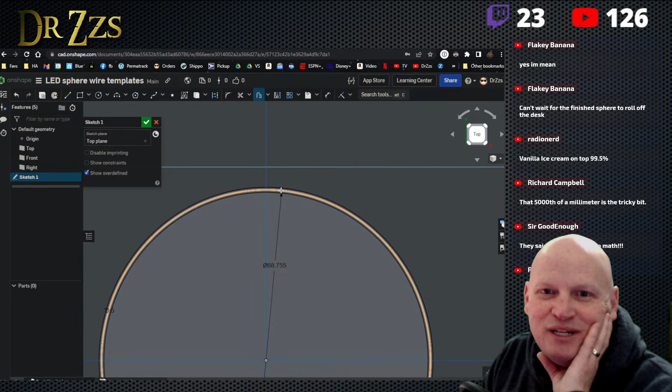Can't wait for the spinning flaky banana. Okay, that's pretty good, so we got that.

So that's great. So the next thing we got to have is we actually have to have some structure to this, so now we need a wall outside of that channel, right? So that's our wire, that's the width of our wire. So this is kind of the inside wall of the channel that we're going to build.

So now we're going to, again, offset. We're going to offset out - I mean, what's a good, 2 millimeters maybe, just to give it a little bit of structure. I'm going to go out, I think 1.5 or 2 would be fine. And 2 seems like a lot. Let's go 1.5.

Okay yeah, that's pretty good. And then we'll do the same thing on the inside. So we're going on the inside, and we're going to offset again, 1.5. Okay, so those would be the walls, right?

Go out the width of the LED. Well, this is just to bend the wire - I'm not going to have the LEDs on this part, this is just to kind of bend the wire. Okay.

Unless I'm not quite sure what Stboch - I'm not sure what you mean. Okay, so that's that part of the sketch.

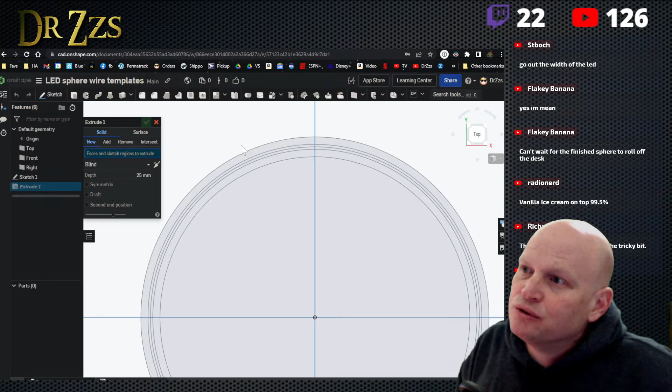Now we extrude. This is a good lesson in 3D modeling also. We're going to extrude it, and we're not going to extrude it by much. We'll extrude it by 1.5 again.

You got to think about how long is this going to take to 3D print as well, right? And then we're going to cut out a little lip here so that we can actually grab it with our fingers.

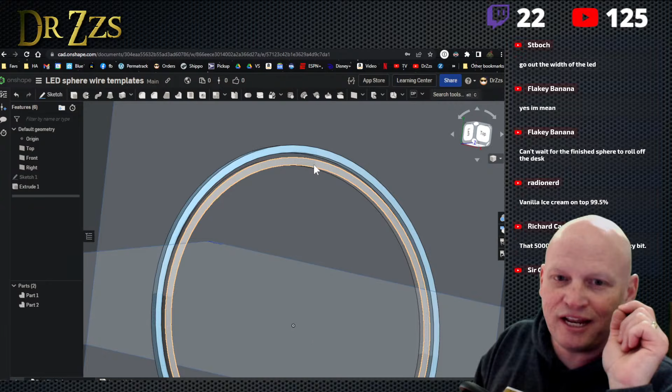If you build like a wedding cake, then you could do all of them on one. We could do that, let's do that. Just throw a squirrel at you. If you made a cone and put the grooves in at the right circumference all the way down. Yep, so there you guys go, you can do that too.

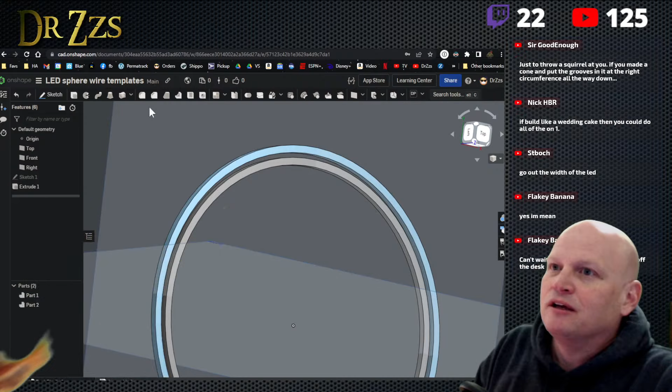But let's think about how long it takes to make this thing. All right, so then now to close this off, because I want it to have a bottom on it, I'm going to put another sketch on the bottom. I'm going to grab the edges, that's what this little guy does, so that's going to include this edge and that edge as part of this sketch. That's it, I'm just going to grab those two pieces. Now I've made a sketch that has those two, let's see if I go to this sketch.

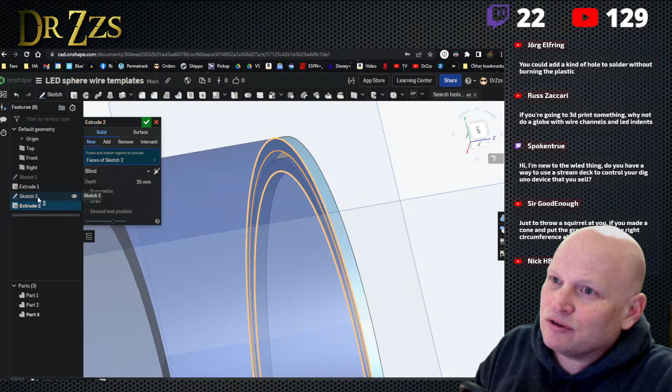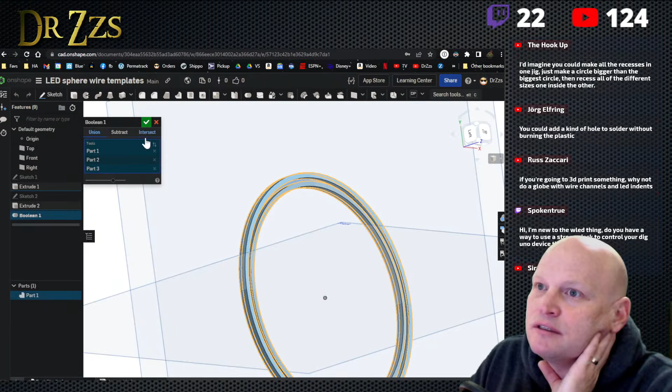Take this sketch and extrude, and I just want it to extrude out just a little bit. I don't even need that much, so we're going to say 1 millimeter. All right, and then we got to add all these together, we want these to combine, so we're going to Boolean them all together and just make them all one piece.

All right, sweet, let's take off these, they're getting in the way, they're ugly. Okay, so there's our first ring. Pretty easy, right? We do need, though, something cut out so that we can see it.

I'd imagine you could make all the recesses in one jig. Yep, just make a circle bigger than the biggest circle, then recess all the different sizes in the one inside the other, that's kind of where I'm thinking, Rob. That's kind of what I'm thinking. Open up a piece in the inner circle for soldering.

Well, so the soldering you do in this thing, so the soldering all happens in here. So we're going to take this template we're making, and we're going to use it so that these wires are bent perfectly, so that they don't have all these issues. So we're going to press the wire into this template, and then we're going to take the wire out of the template, bend it up, set it in here next to the LEDs, and then solder it to the LEDs.

Are you going to solder the ends of the wire together? Good question, yes, I'm pretty sure that is part of what you have to do, because these just make whole rings. So the bottom ring is always ground, the top ring is always positive, and then you connect them with loops. So you connect from the bottom to the bottom, and then this one goes top to top, this one goes bottom to bottom. So you got to connect all the tops and the bottoms all the way up and down. Oh, you're not seeing it. You got to connect the tops and the bottoms all the way up and down with these little loops like that.

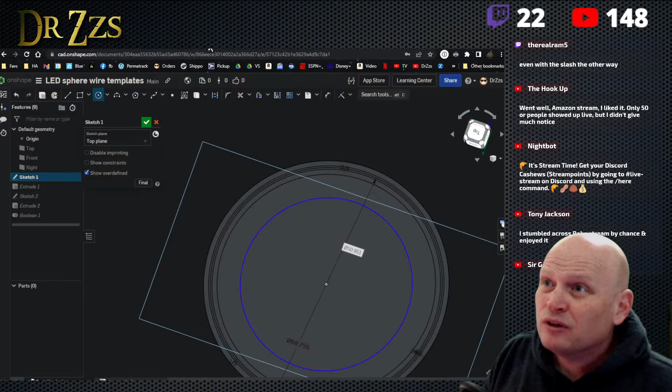So we can go back to this first sketch again. We can draw another circle, start in the center point again, and go out here to - is that number 64.3? 64.3. Let's see where it ends up. Oh, it ends up right next to that other one.

So the thing to do... should we do it in separate circles? Much easier in Tinkercad? Not if you don't know how to use Tinkercad. This is all I know how to use.

64.3. See, it's going to be cutting into the wall of that other one. So we could elevate it. I guess that's the thing to do. Let's elevate it.

FreeCAD, Tinkercad. All right, well, let's do this. Let's elevate it. Let's elevate it.

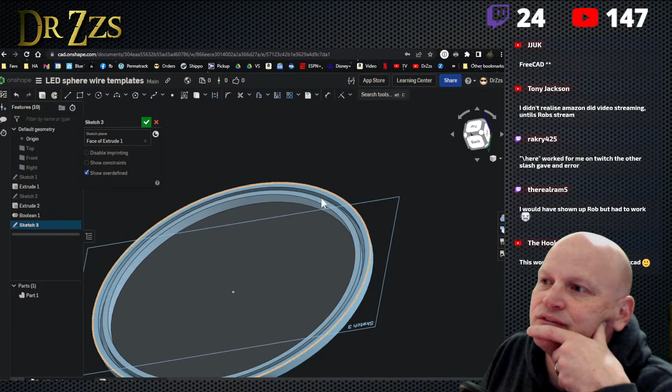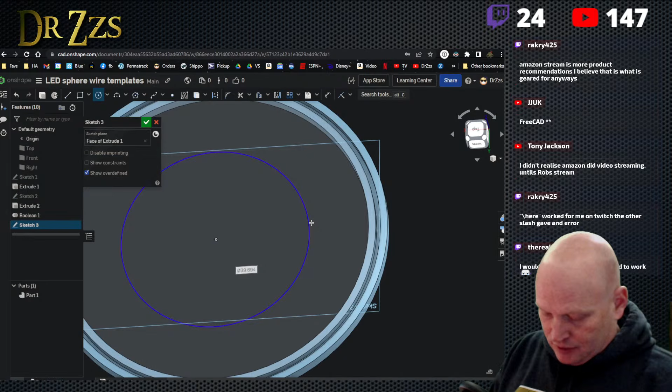So we're going to do a sketch. We're going to do it on top of this piece. So now our sketch is the flat side of this inner circle. And now we'll do our... I missed the center. Oh my gosh, I missed it again. Kidding me? Right there. All right, and it was, what did we say, 64.3?

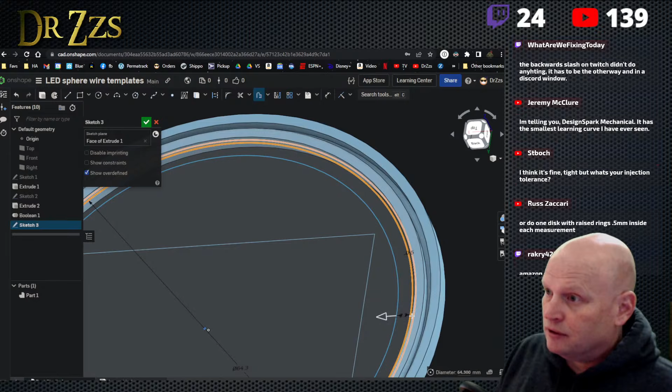64.3. Okay, so from there, now we're going to do our offsets again. We're going to offset it out 0.5. And we're going to offset it in 0.5. And then we're going to have to offset the outside wall. Make sure we get the right one. That one. We're going to offset that out. Let's not go a whole millimeter. Let's go something less this time. Let's go like 0.7.

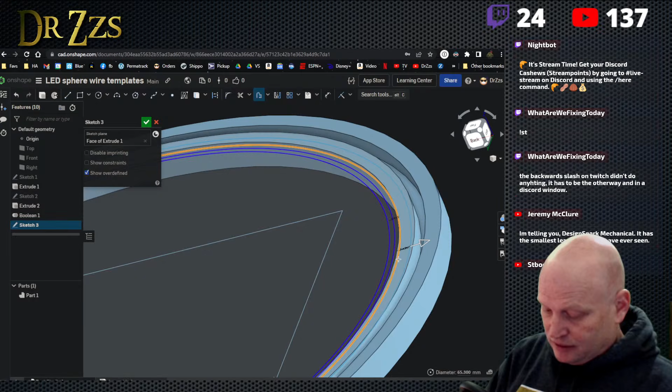Yeah, that's pretty good. And then we'll do the same thing on the inside, because this is going to end up the same. So there's one that's 202 and one that's 198, so these are going to be about the same. Again, so we're gonna leave this inside one, we're gonna make 0.7 also. And then we will have to do some filler underneath here, but I think if we just chamfer that inside, that'll work.

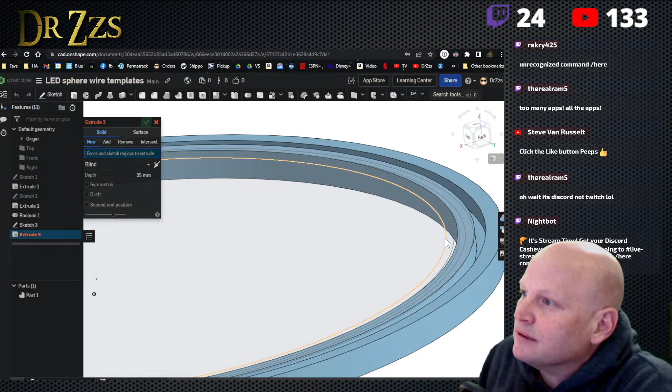Too many, all the apps. All right, so now we extrude. We extrude that guy. Extrude that one. Extrude that one. We're going to extrude them like 1 millimeter. Isn't that what we did on that first one? Right? Can't tell.

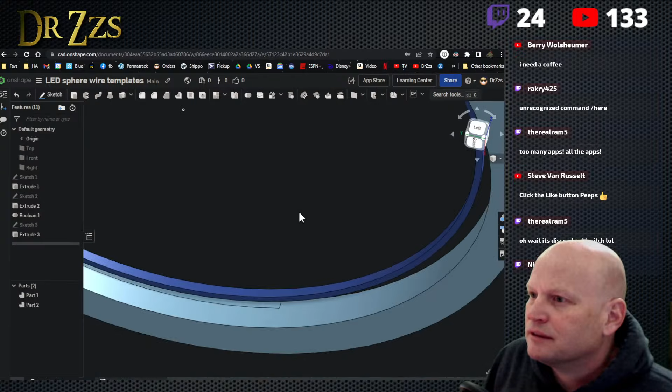Yeah, all right, excellent, excellent. I think that's excellent. That's off. See how that's off? I don't think my centers are lined up. See that? Something's wrong. Yeah, my center points are not lined up. Ugh.

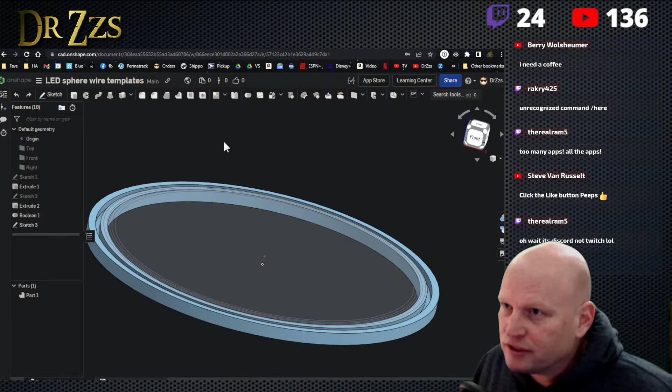Cursed turkey. Yeah, this is probably easier on Tinkercad. Somehow I messed up my center point. That was weird.

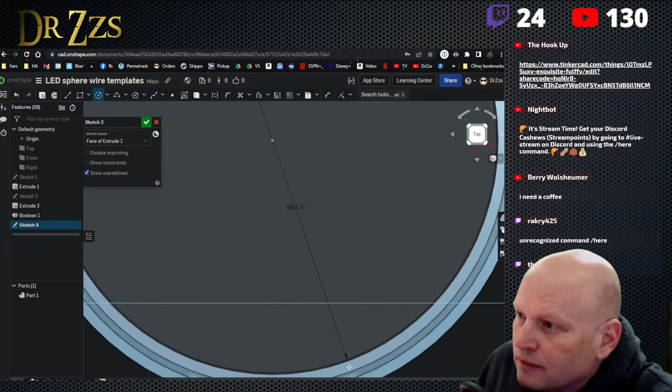All right, let's do it again. Sketch, lined up there. Center point. Why does it want to go to some other line? Like it wants to go to some other point. I don't want it to go to some other point. See, that's not the center. I want it on the center. It doesn't usually mess me up like this. There, that's the center. Sheesh. Okay. There we go, now we're in the right spot. Now we're in the right spot. Okay.

We're going to offset 0.5 out. We're going to offset 0.5 in. We're going to offset another 0.7 out. Set another 0.7 in. Okay.

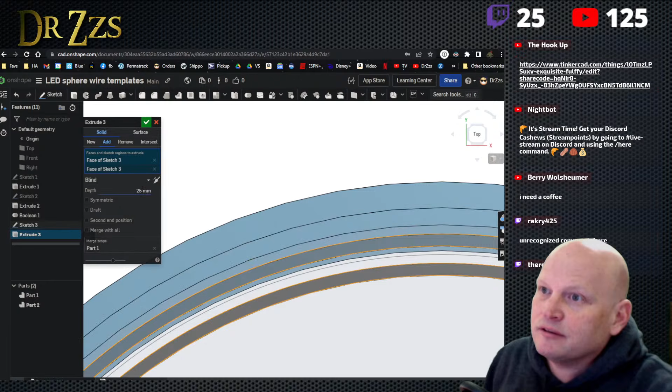Now we're going to extrude that and that by 1 millimeter. Okay, excellent, excellent. All right, that's better. That looked a lot better.

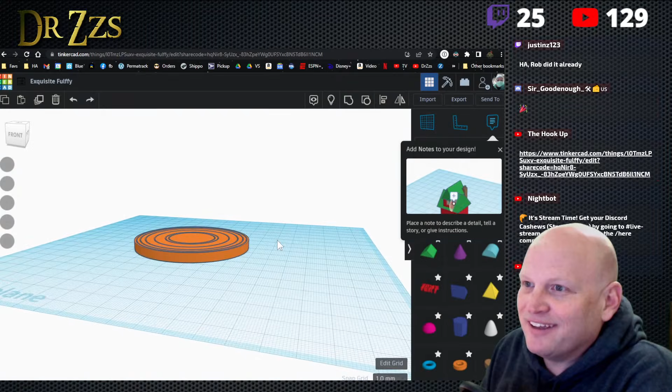Did you already make it in Tinkercad? Is that what you did, Rob? Did you already create all this? Done? Had a Tinkercad account at some point. Yeah, you did it already. Okay, sweet. Okay, Rob did it. Perfect. Thanks, Rob.

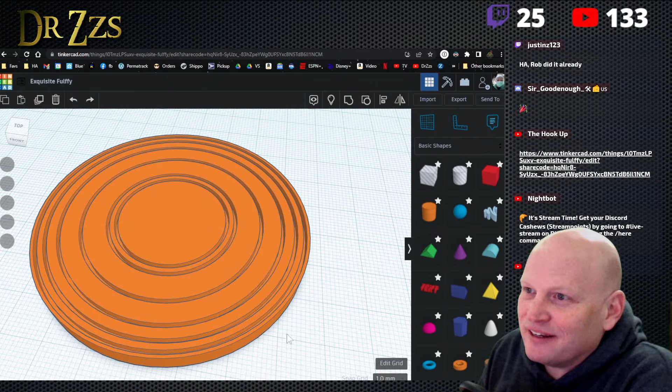Can we cut a wedge so that we can get into there? Cut a wedge so we can get into there. Can you do that? So we can get our finger, like something to slide in there? You did do it fast. Holy cow. Just enough we can use tweezers or something. I can do it. I don't even know how. Oh, there it goes. We're going to watch you do it live.

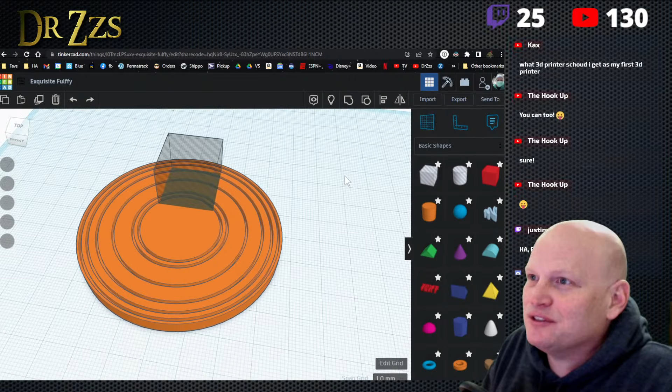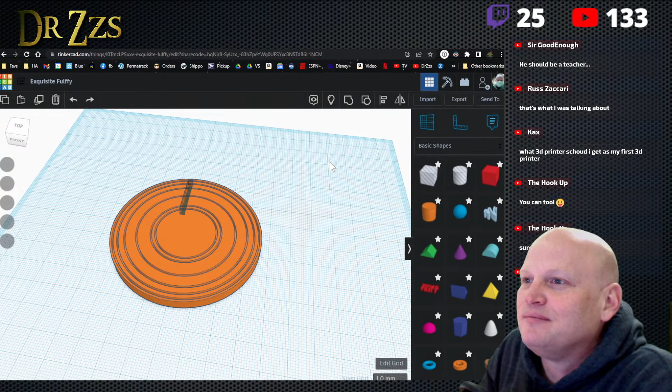Yeah, you're so good at this, Rob. You could be a teacher. So he's making a little bit of a slot for us to be able to pull stuff out. It's not centered, though. Oh, there, not centered. Thank you.

All right, so we'll get this printing as soon as Rob's done here. That'd be great. Perfect. Yep, that'll do right there. Right, guys? What do you think? That's perfect, it's like he's been a teacher for years or something. Yeah, I think that's perfect. What do you guys think? Good like that? Great. Anything else we need to do to it?

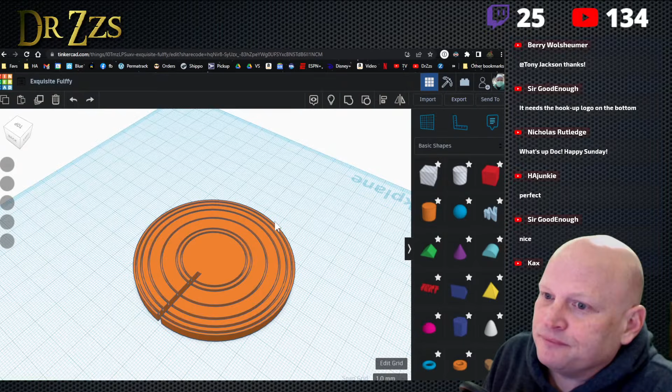Yeah, put the hookup logo on it. I don't know how long that would take. Okay, I'm going to export this. Export it as an STL. Downloading the model. Exquisite Fulffy.

And we're going to call it... thank you, Rob, for doing that, you're amazing... we're going to call it the LED sphere.

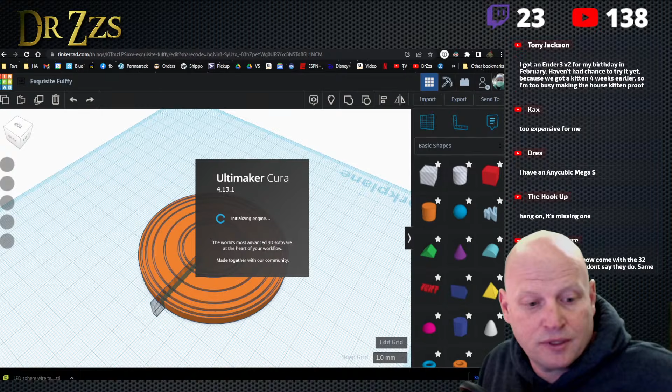Thanks, Rob. We'll have Cura open and ready. I'll just watch Rob do this.

I bought one and a Big Tree Tech board at the same time, only to find out the newer Ender 3s are already shipping with the 32-bit board, just without the big screen. And the new Ender 3s you're talking about, is that the V2 S1? Should just name it something different. Got an Ender 3 V2 for my birthday in February. Haven't had a chance to try it yet because we got a kitten 4 weeks earlier, so I'm too busy with the kitten. Just want to shout out to Rob for being awesome. Thank you, therealram5. Thank you, thank you, thank you.

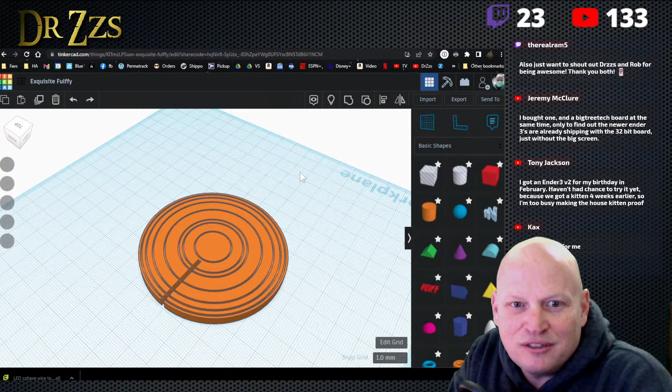Added that one. Okay, now that's in there now. Okay, great. Perfect.

Oh, crap. Something happened. I'm just going to wait a second till I get the full approval from Rob to download it.

Regular Ender 3s are shipping with the Ender 3 V2 boards.

It's hard to go wrong. Most of these 3D printers, even if they don't look - isn't the Artillery one of those that comes with the volcano and a huge nozzle? Not the Genius, maybe the Sidewinder. Yeah, not the Genius. Dual Z is only good if the board will control them independently. If they are cloned, it's a mess. That's good, I didn't know that.

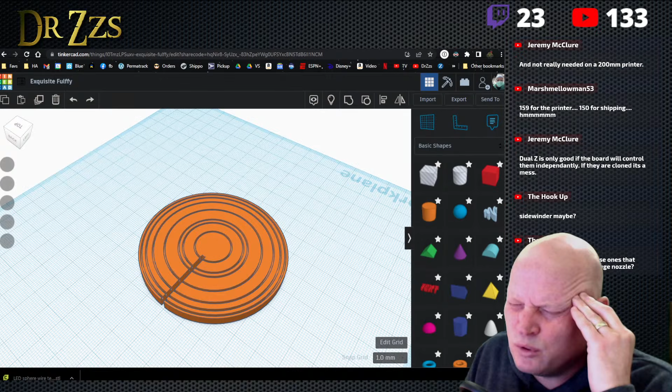So the reason I got interested in having - why dual Z became so important to me - was because my Ender 3 V2 Z got out of whack, and I thought the way to avoid that is to have dual Z.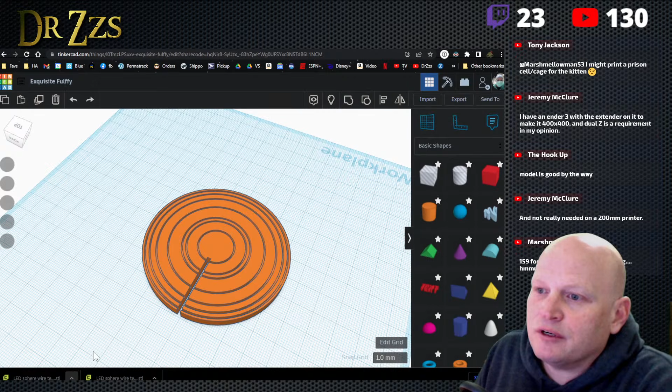Okay. LED wire sphere, we're going to just overwrite that one. Yes, okay. And now we're going to pop it into our Cura. Oops. Right there.

Okay, I shouldn't need - I mean, that's a lot of surface area there. I shouldn't need a brim on it. I've been printing a lot of things with rafts, but I should be fine without it. I don't even need a skirt on this one, to be honest. I don't want it to be the best, I don't need it to be the best. Good is probably going to be good enough.

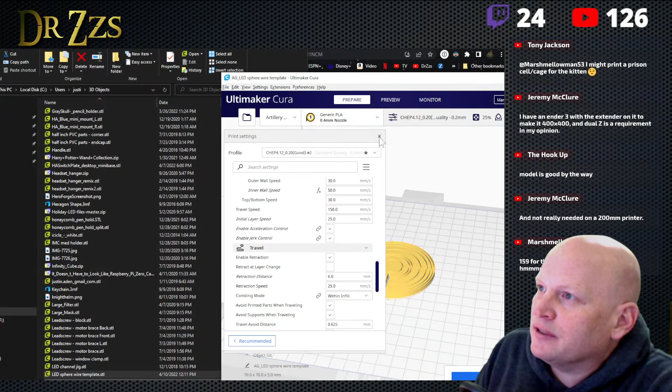Keep those changes. Okay, and then let's slice it. No rafts, just hairspray. Hour and 55 minutes.

Okay, well, we're not going to be able to get it printed today. Not for the stream, at least. And I don't even have Octoprint hooked up. I was such an Octoprint person, like I had to have Octoprint all the time. And now I just do it with the SD card thing. It's just so easy.

Just like that, it's printing. It's gonna start now. I'm just ready to go. So we're just gonna start with printing. In the meantime, Rob, thank you - that's huge, and I'll use this. We'll see how it works.

Assuming we don't want to make any more changes to it, we'll send it to the guy who did the Instructables and let him check it out.

Thanks for being here. Rock recital, nice - playing the drums in a band. Oh my word, that sounds fun. You got to give us a 30-second clip, Rob. Do a YouTube Shorts or something, a little clip so I can see your daughter playing the drums. That sounds awesome.

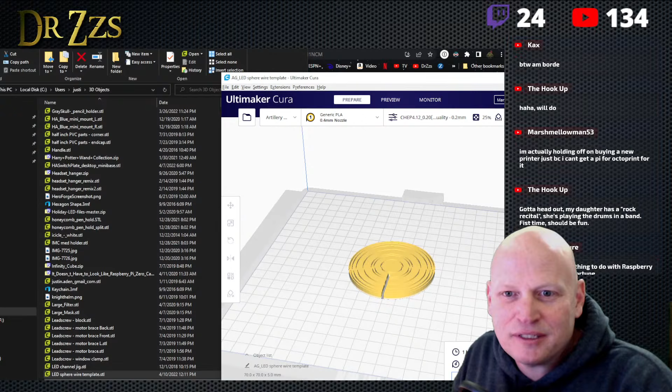No raft, just hairspray. Okay, bring out the sheet - count the circles, then count on the jig. Bring up the sheet again, count the circles, and then count on the jig.

1, 2, 3, 4, 5, 6 - he's got 7 different sizes. 1 through 8. Maybe it's because he didn't do a separate one for the small one up here. Probably something like that. Oh look, these are all different sizes. Oh crap, because these are different sizes down here too.

Oh interesting, look at these numbers down here - I didn't see those. 106, 136, 148, 171. Well what we can do is cut the wire. I'll get the caliper here and start cutting, or cut it based on this - I got a ruler here. So I'll cut the lengths of wire according to these numbers, and then we'll go from there.

This is kind of fun. That LED cube wasn't that bad, so this is like the next level of difficulty. You think there's 10 circles?